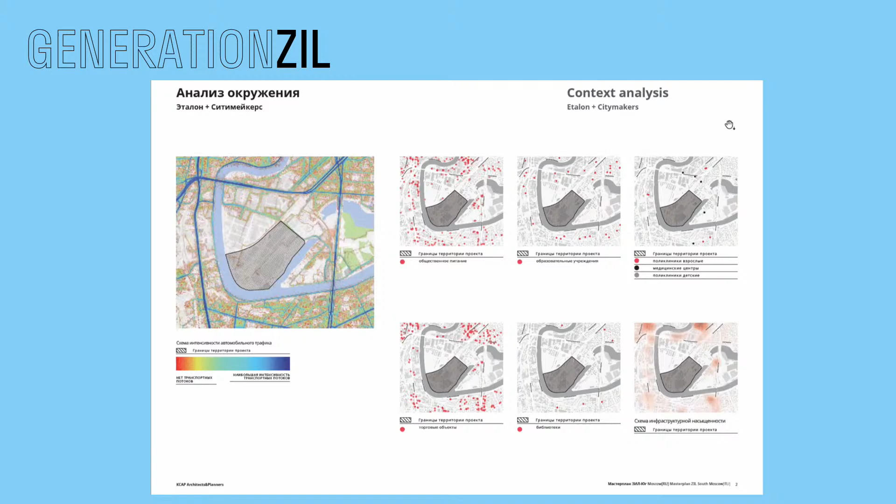Today I'm wearing two hats, not as a council member, but rather as a member of this large and diverse team. Before giving the floor to the colleagues from KCAP, I want to say that we paid special attention to the analysis of environment, all of the urban planning restrictions, specifics of our site, etc. We realized that we need to take a complex approach to the environment, and that's the approach we're using currently.

We're very happy that the client is fully sharing our approach, and together with the project team we are going to enhance it. In parallel, and sometimes even at the crossroads with each other, we continue working, analyzing not only the existing provisions but also regularly improving our vision of the site.

We're enhancing the master plan. This work is headed by KCAP, and already now we're thinking about the landscape, social, cultural concept, the function of the ground floors, and all the matters regarding architecture and development. Above the first line of construction, we already had an architectural council, and we are taking into account transportation, logistics, and entertainment as well.

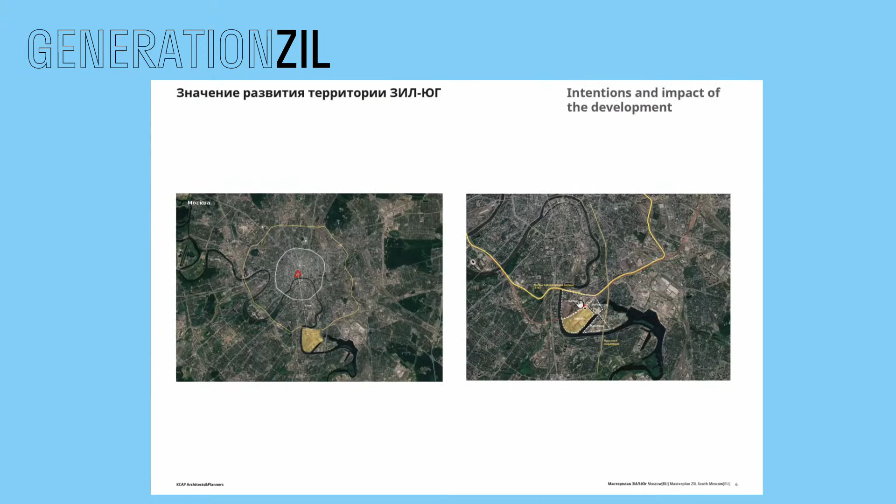For these two stages that we developed together with the colleagues, we developed a lot, and we will give you the summary of the project and the strategy of the master plan. It's wonderful that Etalon didn't just take the site and start building, but saw the huge potential of this site, so they decided to interpret and improve it with experts.

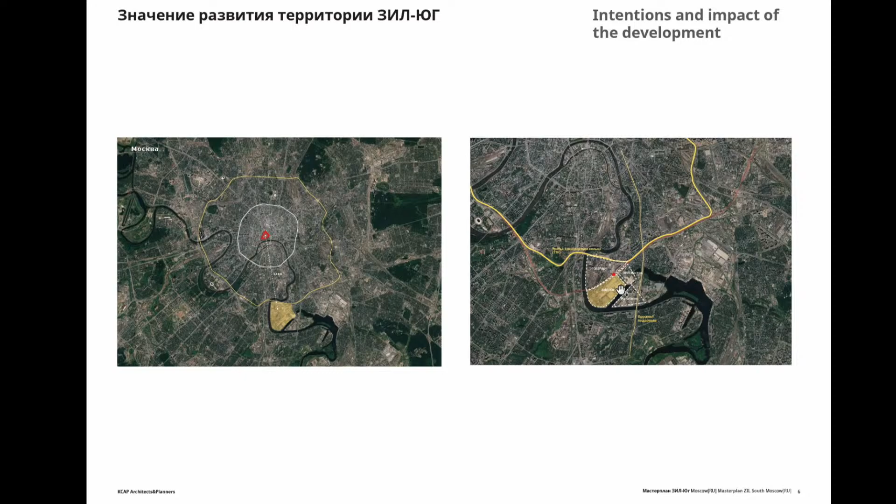This will be a house for 25,000 future inhabitants. For Zil South, first of all we needed to improve the flexible spatial structure framework to integrate it into the city fiber, and within the framework of this city fiber, we develop concepts that will help every site.

At the same time, we want to create a dynamic, innovative neighborhood. We suggest a safe and convenient design that is human-centristic, that promotes human connections. We want to create an active, 24/7 neighborhood that will give a threshold for further growth and improvement of quality of the surrounding territories.

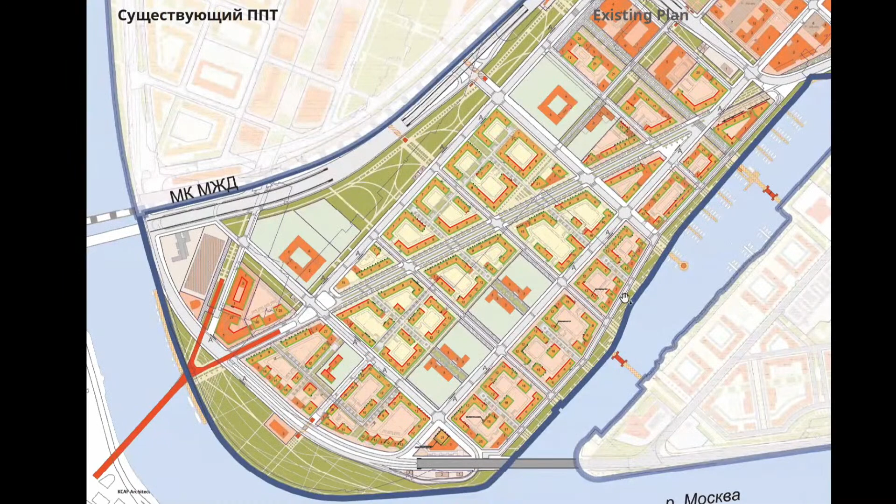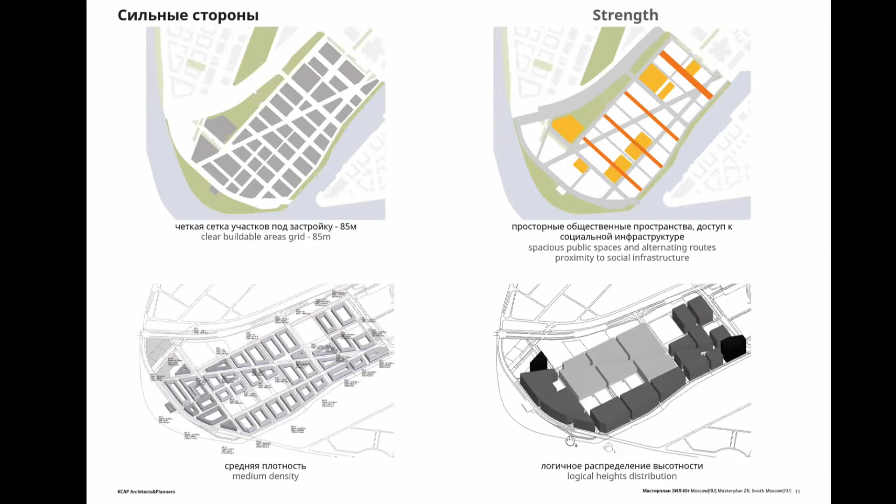A few years ago, the suggestions on the territorial planning were presented. They laid the foundations for our master plan. We have analyzed this document and found the strengths: 85 meters, social infrastructure, average density in the neighborhood, and also density increasing closer to the riverbank and metro station.

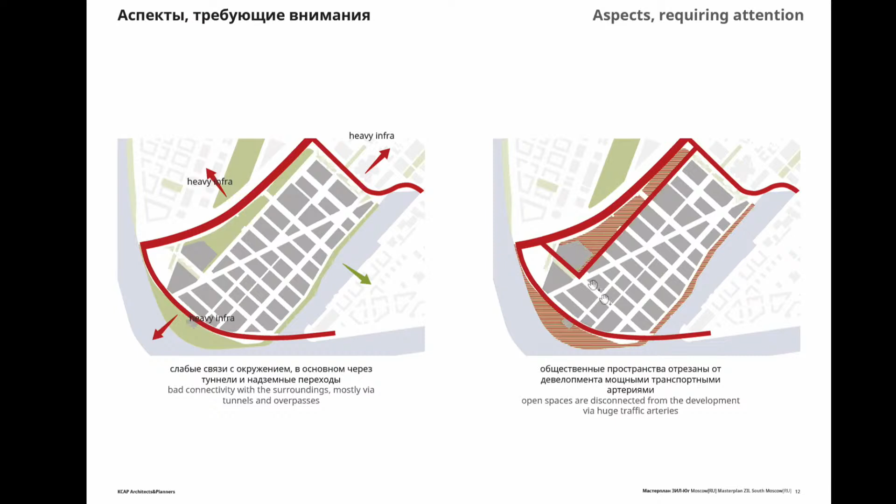There are weaknesses too: connections with the surrounding area mainly via tunnels and above-ground passages, traffic-full roads adjacent to the site, absence of magnetic areas in the territory, and absence of quality space within the territory. The territory was monotonous and lacked big cultural functional magnets.

To enrich the city fiber and make this project strong, we suggest two interventions. First, a central park. It will not only connect Zil to the embankment in the eastern part and connect it to the metro, it will create a special space inside the urban structure.

The second thing is a pedestrian boulevard. It will connect Zil metro station and Zil East on the riverbank. This boulevard will become an attractive route surrounded by a series of small squares, creating a friendly pedestrian axis that connects the entire social infrastructure.

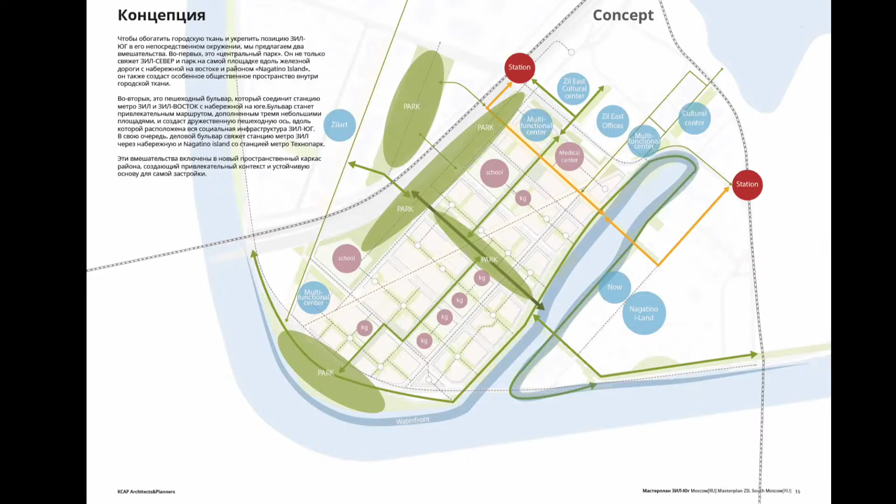In turn, it will connect the two metro stations on the riverbank with the Zil metro station. In this way, it will become a city of short distances, where within a 15-minute walk each inhabitant will be able to go from their doorstep to important social places.

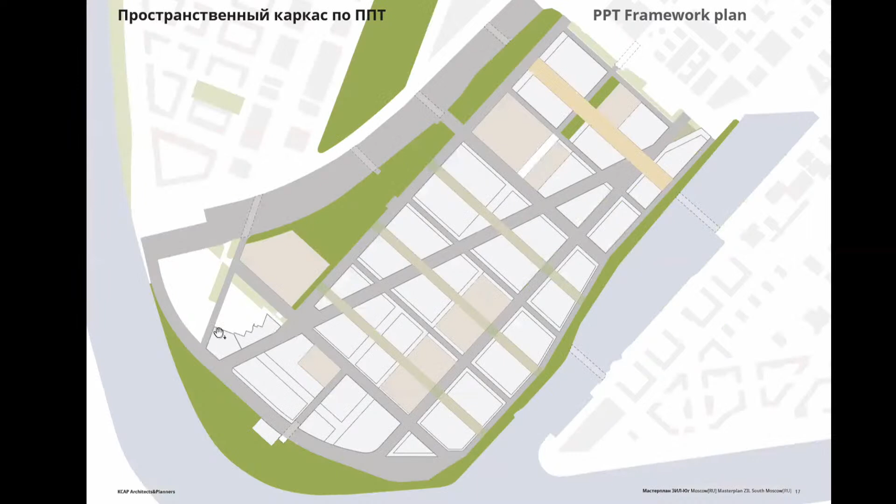On this scheme, you can see the existing document, the PPT framework plan, and our master plan. This is the working version of the master plan, creating an attractive context and a robust basis for the development itself.

Since we have no other spaces apart from the PPT framework, all the developments take place within this space, and the public spaces are there too. The hierarchy of public spaces is solved by the XL scale: parks and embankments, L for boulevards and squares, M for...

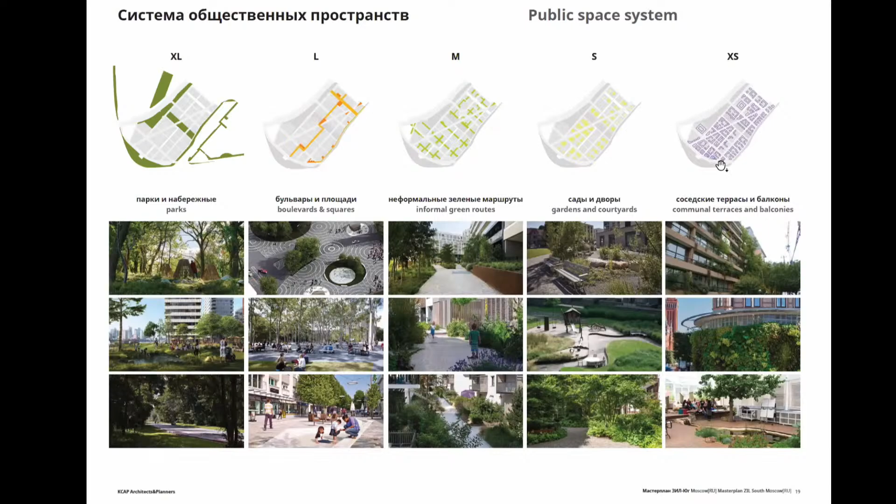M and XS — XS being the terraces and balconies — so the scale is going downsized. You can see here the central pedestrian boulevard, around which we have the central place, the square of the neighborhood, and two community plazas, also the business boulevard with a business square.

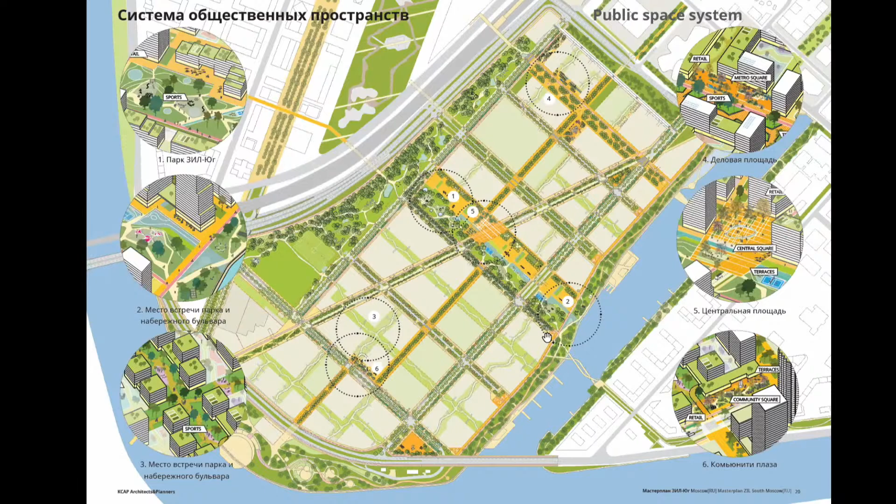It will welcome everybody coming by metro, and also the Embankment Boulevard. It connects with the first square of the neighborhood and a series of small pockets along the riverbank. We also suggest a series of open itineraries inside of the district, penetrating through all parts of the region, connecting them into one.

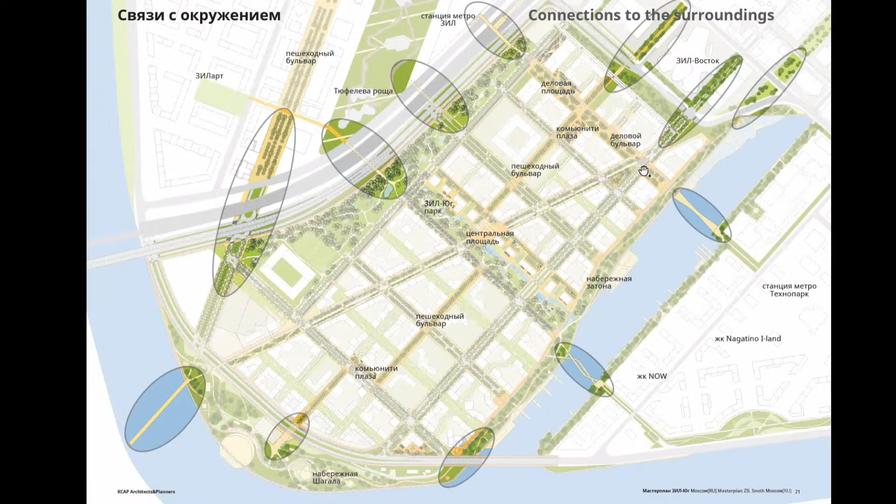As mentioned before, this harsh infrastructure around is cutting off this district from the rest of the city. That's why it's really important to build additional ties with the city: overhead bridges across the river, pedestrian underground passages, and on-ground passages.

What matters here is also the social characteristics of the future neighborhood. Who is going to live there? Which functions are they going to use? We develop 3 daily scenarios depending on the users: local population, tourists, and workers living in the territory, and workers living outside the territory.

We also took into consideration the content of the ground floors. We look at the features of schools and kindergartens of the 21st century. They need to involve new methods of teaching and education to be attractive for children. Secondly, we have large sites for educational and enlightening functions.

So we suggest the social infrastructure to have dual use. We have lectorium, exhibition spaces, stadiums, and children's playgrounds that should become part of the well-being of all the residents. They should be available during evenings, daily, and during the weekends, etc.

We also revised the road network and tried to make it multimodal to make sure that every person is comfortable while moving around. Zil South is about architecture for humans. We promote public transport here, and we have separate lanes for buses.

The urban construction principles and atmosphere of each quarter will be directly tied with the functional magnet it is attached to. Living near water, or in the garden, or in the business quarter, or by the park will also be a brand new proposal on the retail market in Moscow.

Here you can see what the quarters look like. In the river quarters, the typology and space of the buildings is as open as possible and connected to the river. Urban gardens have a specific interior with urban villas and greenery. In park quarters, they have a very wonderful, beautiful position, with highlights to maximize the ties with the business quarter there. The business quarter is more traditional and perimetric, with more focus, is functionally saturated, and is located near the metro station.

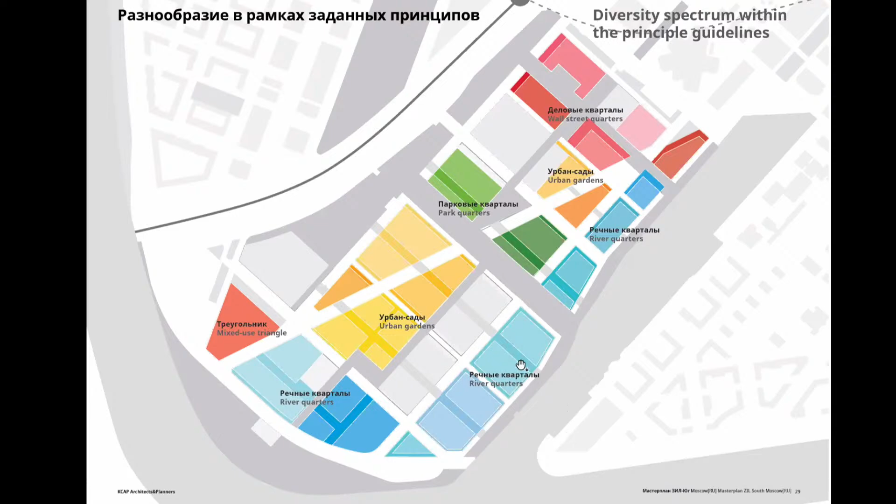To strengthen the spatial carcass, the structure, and to stick to the concept, from the very start we develop a number of guidelines and principles for the development and public spaces. In this way, each site can become unique and yet remain within the framework of our principles.

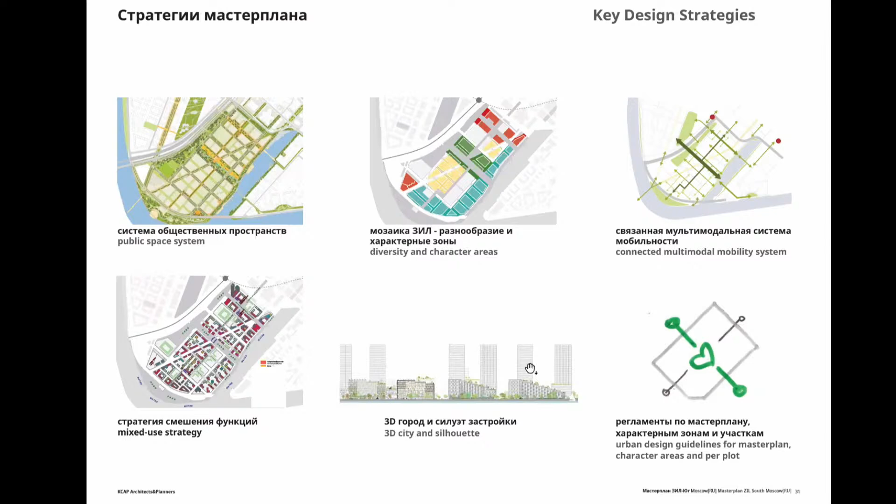Here you can see how the above-mentioned aspects find their place and role in this district by turning it into a happy city. I'd like to conclude and say that we are working within our master plan over public space systems, diversity and character areas, a connected multimodal mobility system, mixed-use strategy, 3D city, and then we develop the regulation. Later I'd dwell upon each strategy separately.

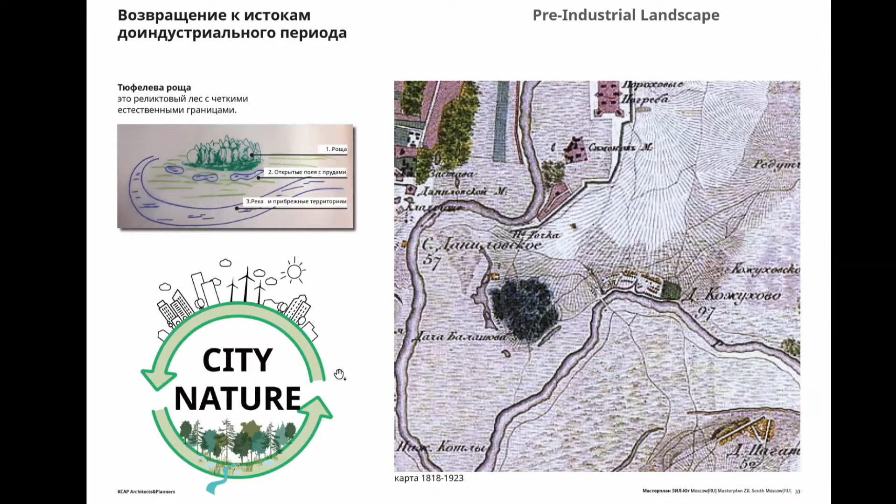The inspiration for this project was the pre-industrial landscape of the past—the Tyufeleva Grove, little forest, and open fields with ponds there. Muscovites in the past used to come here for a relaxing holiday by the riverbank. We transform it into a city of the 21st century. It is infused with urban culture.

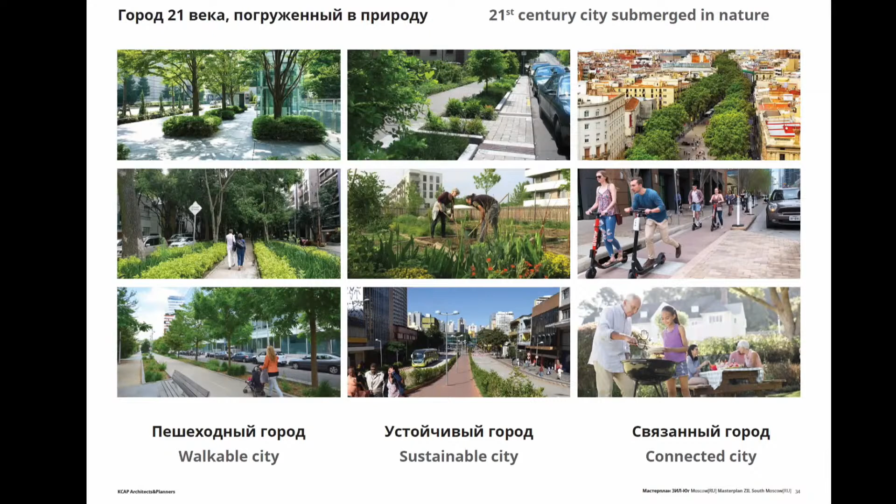In this neighborhood, we will have modern people living who take care of their health. In Zil South, a sporty lifestyle is promoted. Priority is given to pedestrians, cyclists, and public bus users. It's a sustainable district with a functional landscape that promotes educational and social programs as aspects of social well-being.

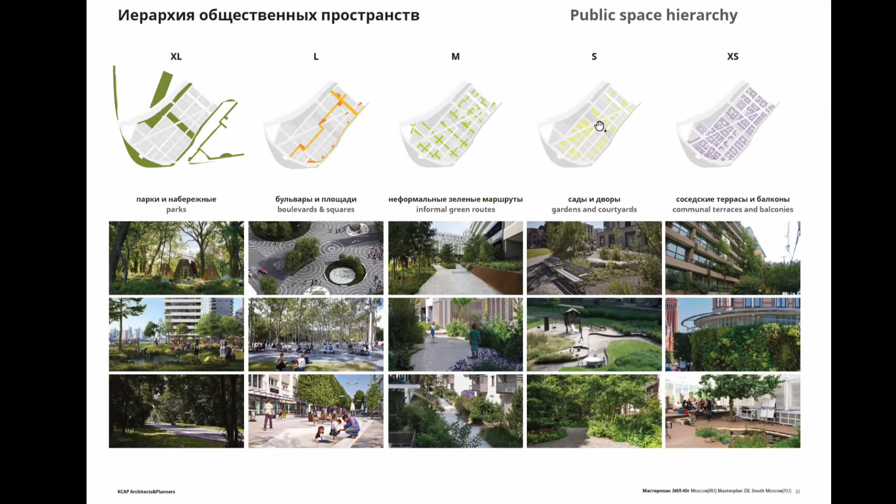As mentioned before, the framework concept of the master plan involves 5 scales: XL, parks and embankments; L, boulevard and squares; M, green routes; S, gardens and yards; and XS, terraces and balconies.

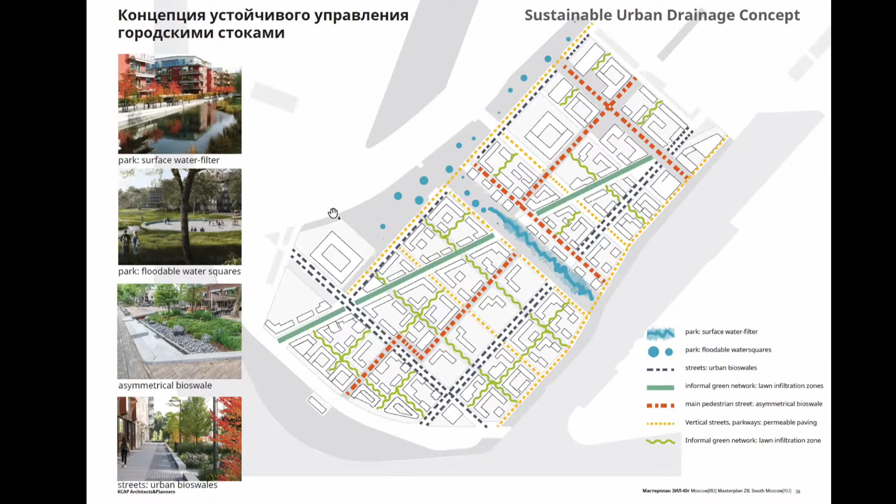We believe the landscape should be functional and reflect attractive design. We deploy a bio-drainage system in all our public spaces - technologies for retaining and treating rainwater, including dryable ponds and sites, and mini drainage. We plant trees to protect the environment and minimize its negative impact, integrating trees to make our environment humanistic. We minimize plastic to make it sustainable.

Let me tell you briefly about each scale. Parks and embankments - parks have their own ideas and design. The central and northern parks are united, and it's important that they tie with a Tyufeleva Grove, or Tyufeleva Roshcha. It's interesting to see how one park is transcendent with another, and going from one park to another is another adventure.

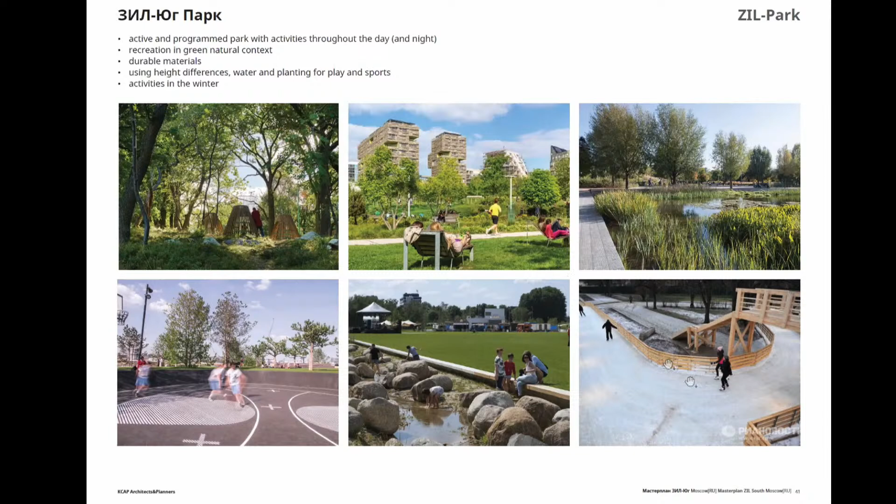The parks are active throughout the entire year, with place and role for quiet leisure and sports. In wintertime, our ponds become ice skating rinks, and the hills become sleighing slopes or ski slopes. We have Roshcha, fields, ponds, and water nature at the riverbank. Roshcha is as natural as possible, with a real forest to protect the neighborhood from noise coming from the railroad and the new highway, and hills of different heights.

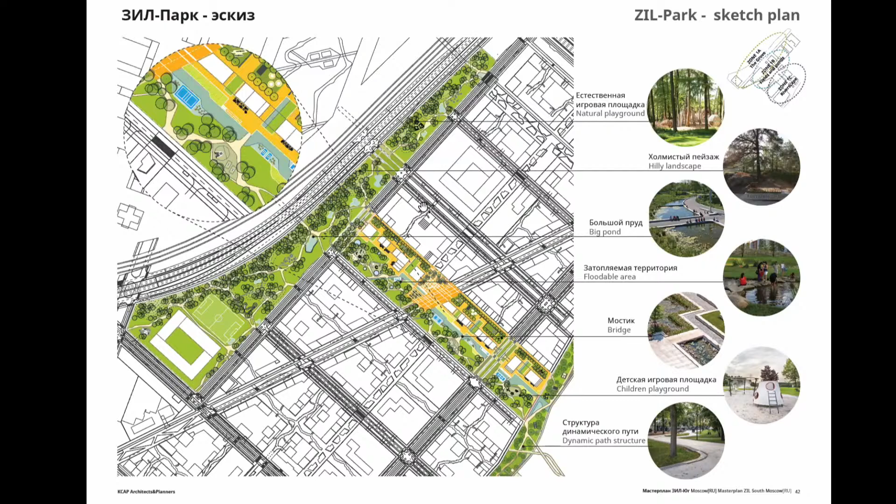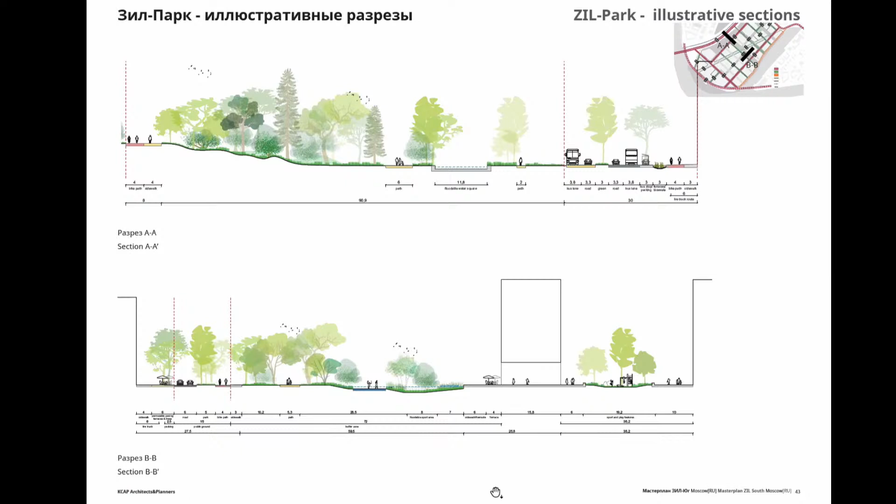We can also see here how our main route and the park concept are integrated in the embankment. The borders are almost seamless - one park is transforming into another.

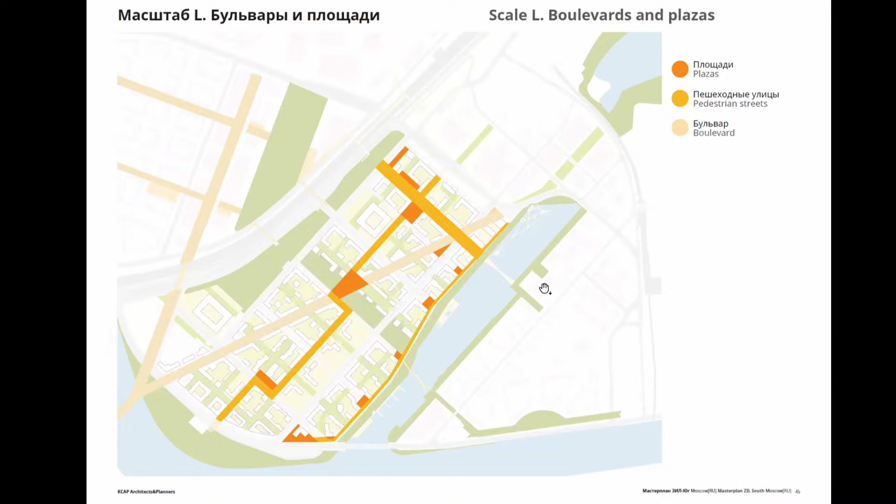The second scale, L, is about pedestrian boulevards - a pedestrian boulevard in the central part of the neighborhood, and the business boulevard from the embankment of the river. The design is associated with the typical area the boulevard is located in. The central square is the pulsing heart of the neighborhood, where all the junctions meet together - the parks, the diagonal boulevards, etc. The size of the square enables different open space events there: markets, lectures, fairs, exhibitions, etc.

Jana, we are losing your voice sometimes. It's intermittent. Well, why don't we listen to Mikhail now, because Jana's connection is not so good. She's freezing sometimes.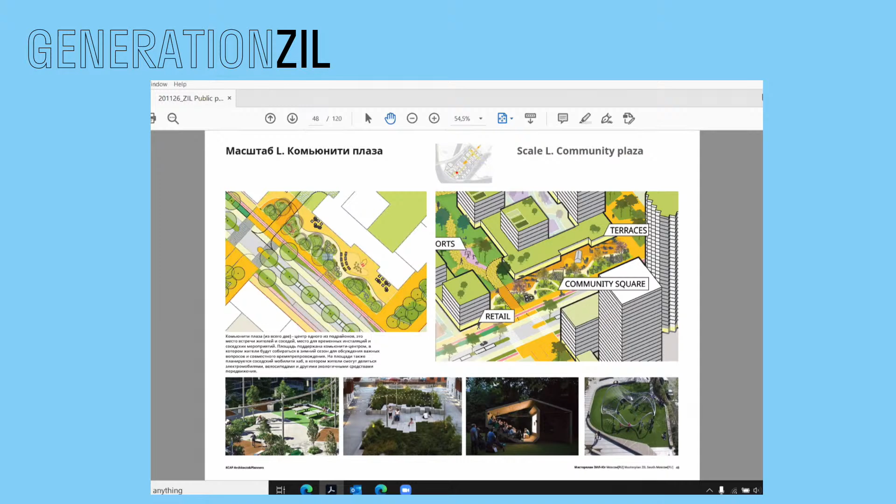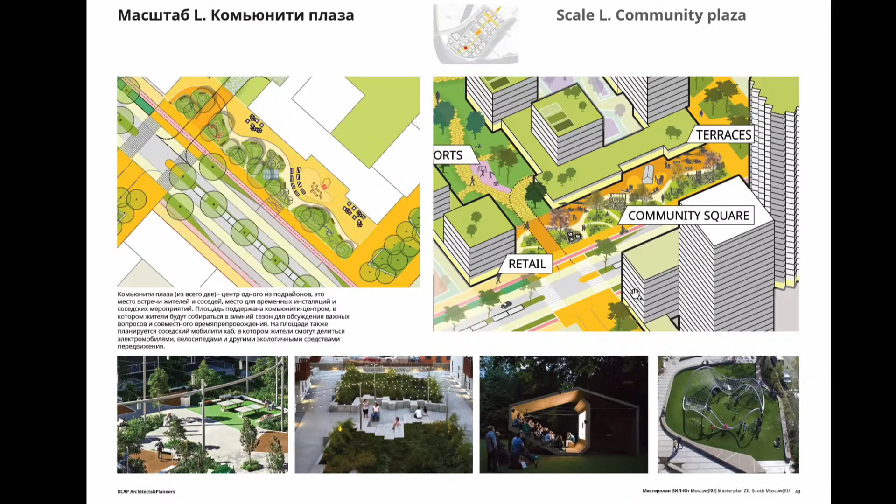So we talked about the squares, the first central square. We also propose to organize a community plaza on the way of the pedestrian boulevard. The squares will be functionally supported by the community centers, and there will be some bike, scooter, and electric vehicle rental, etc. They are located between the first and second line of construction development.

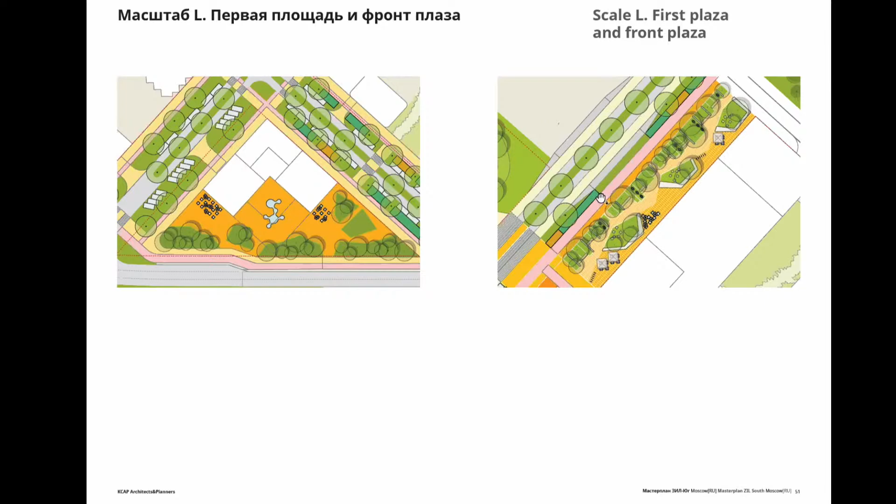The second area is located closer to the business boulevard. The business square is where the metro passengers will come. It has functional diversity of the buildings around. Apart from the above mentioned squares, we have one more square — the first square of the neighborhood, near the first line of development, and the frontal business square near the metro station.

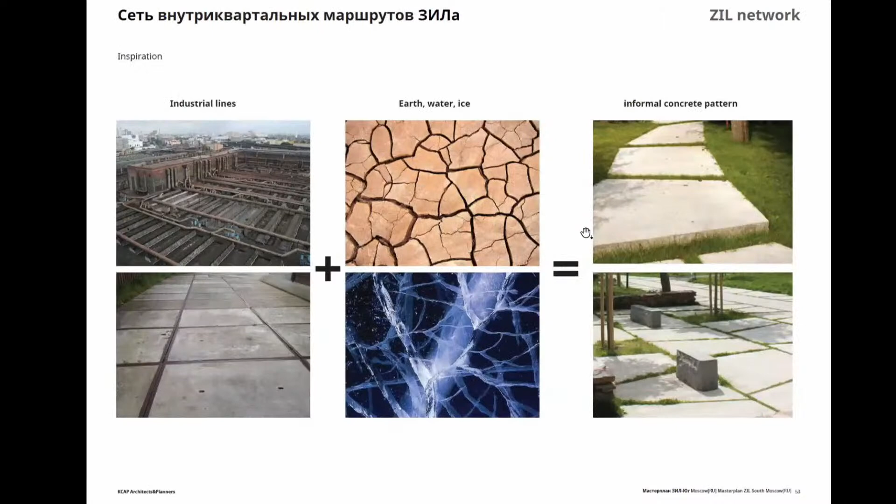The project also envisages a network of pedestrian alternative routes. They are supported by active functions, and they will connect all the sites of ZIL neighborhood, creating a kind neighborhood atmosphere, not only within the yards but also in the district in general. The recognizable uniform pavement and mini drainage are the main principles of these routes.

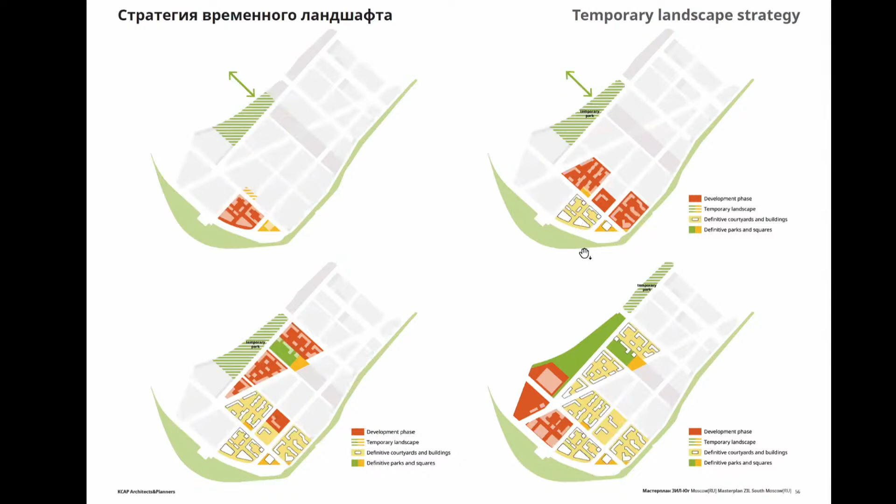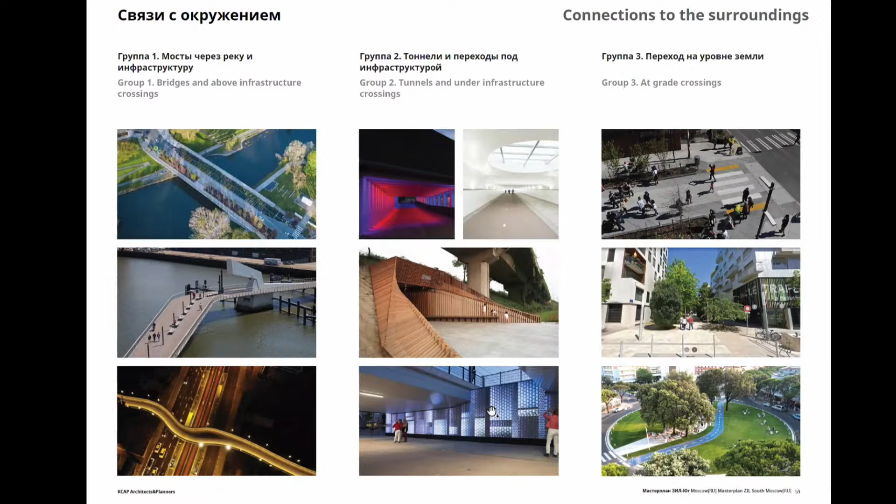We also developed the guidelines for the yards. We think about the strategy of a temporary landscape tied with the rows of construction. It will help us build temporary facilities and develop gradually the entire neighborhood and the landscape. We keep in mind the environment and we care about the quality, so we make suggestions about safe pedestrian underway passages, bridges, etc.

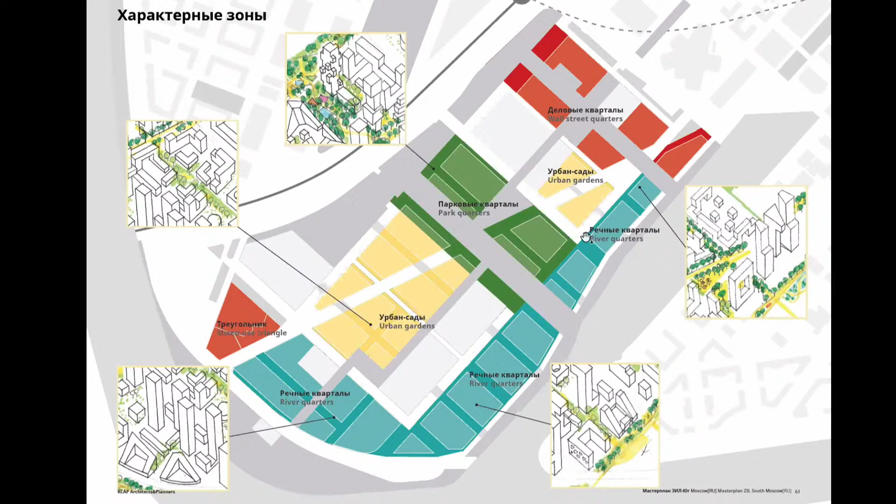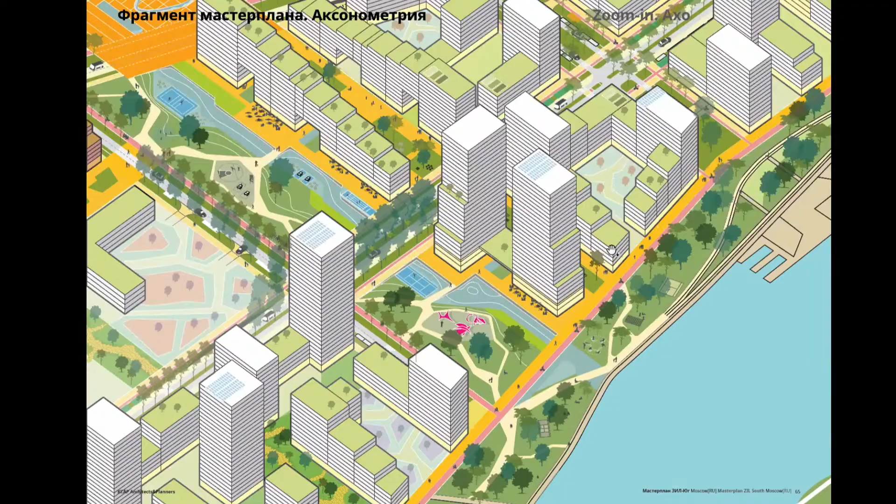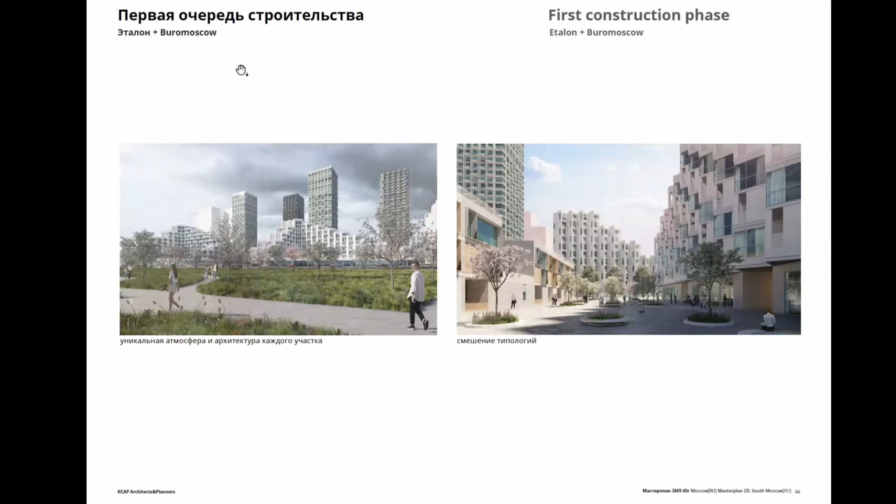Let me tell you about the mosaic — the four typical areas: river quarters, urban, park quarters, and business quarters. Each of them conforms to a particular set of urban construction principles, landscape, and typology. What is the river quarter about? Views of the river, mid-story buildings, high dominance on the second line, maximization of view, refurbishment, and separation of private and public spaces of the yards by visual barriers and heights. The construction complies with all the principles and becomes a pioneer in discovering the entire potential of the territory.

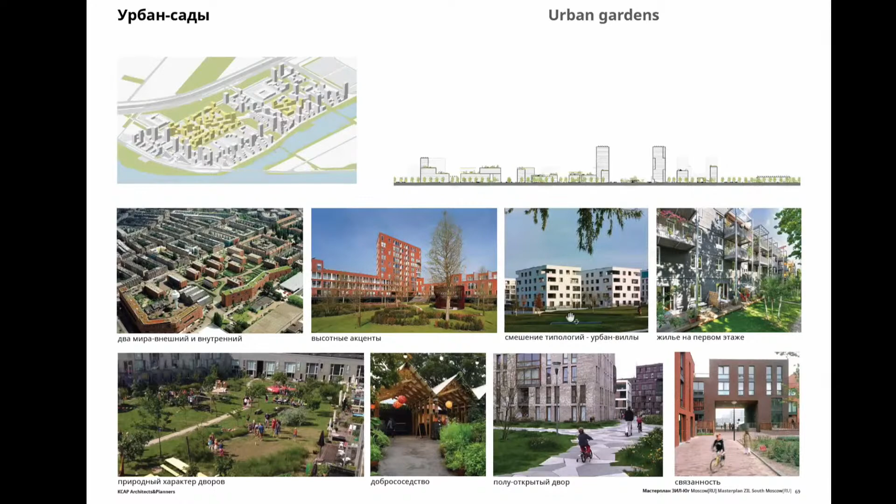What do we mean by privacy and protected neighborhoods? It's urban gardens, places for urban farming, greenery and plants for these low-rise buildings. It's a humane scale of the environment.

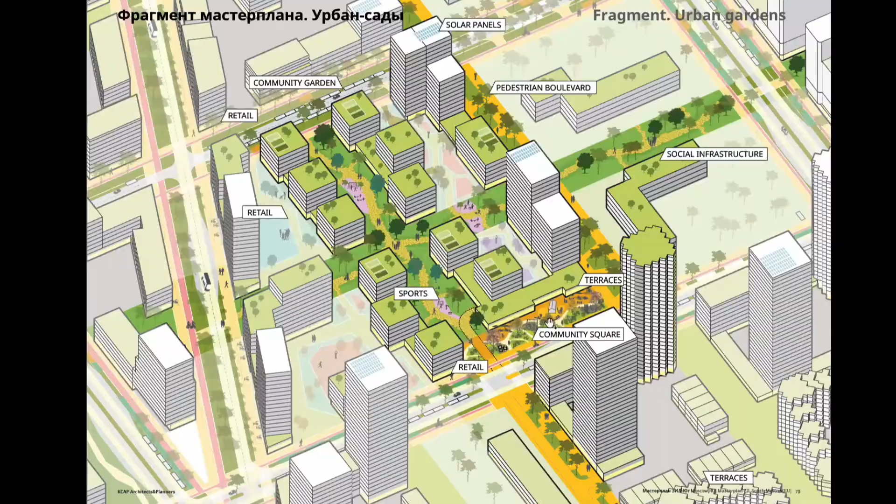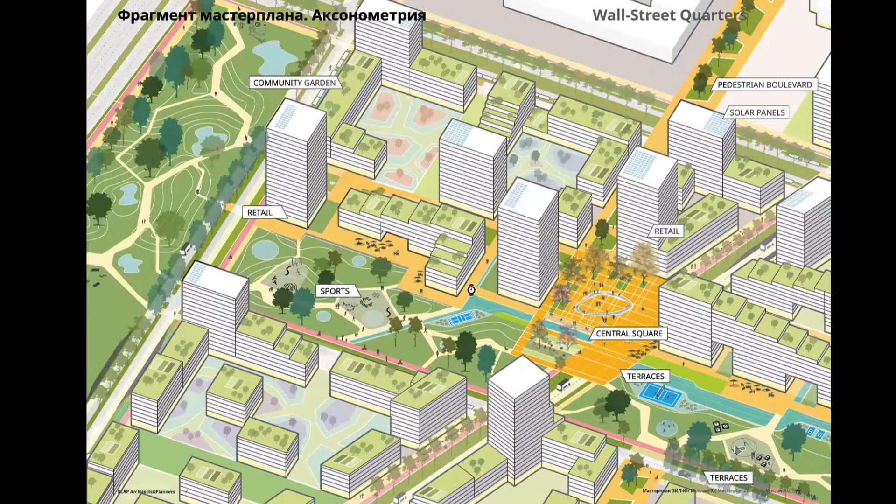Life by the park — it's when you have a park instead of a yard, when you live in a unique architectural building that is the business card, the window of the entire neighborhood, when we maximize the range of various technologies here and the richness of the environment.

As for living in the urban quarter, it's about proximity to the metro station, active and functional environment, enclosed and semi-enclosed traditional quarters with high-rise accents, and strict landscape design. We mentioned the places for landscape architectural dominance where the design should be beyond imagination.

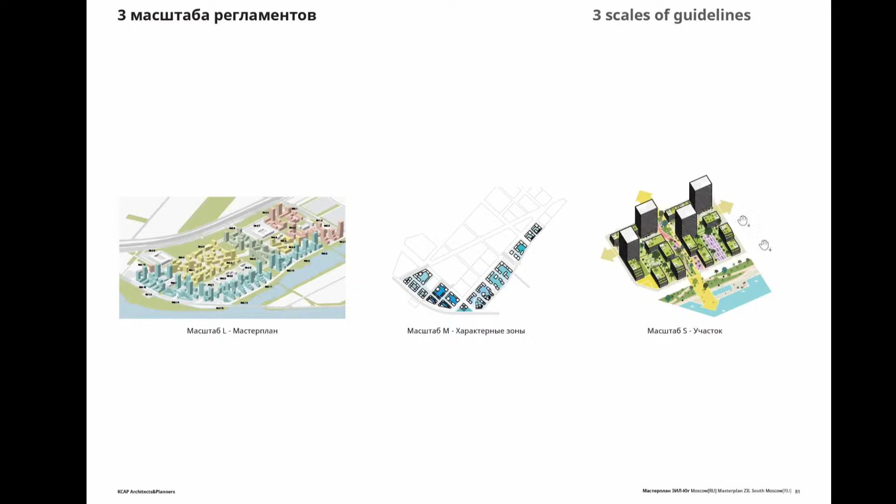It's an invitation for the architects to leave their trace in ZIL-South. These facilities, these buildings will be the iconic ones, and they will be remembered by all the visitors and inhabitants. We developed urban... three scales of principal guidelines.

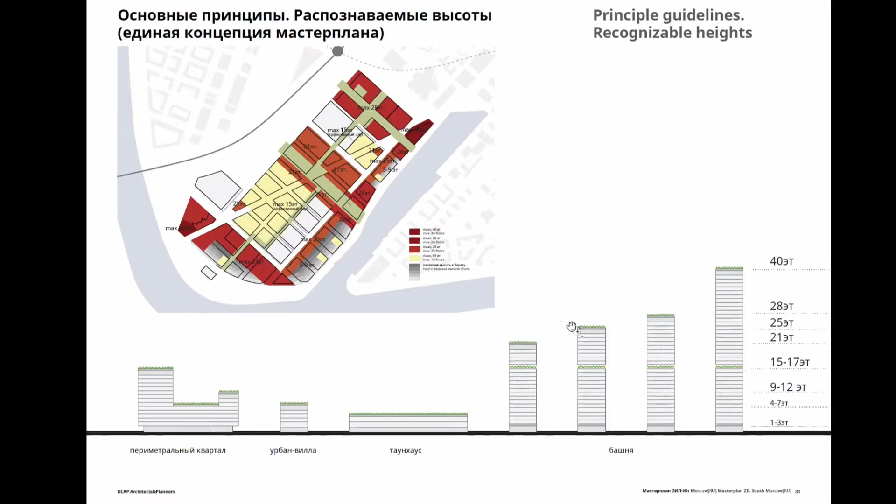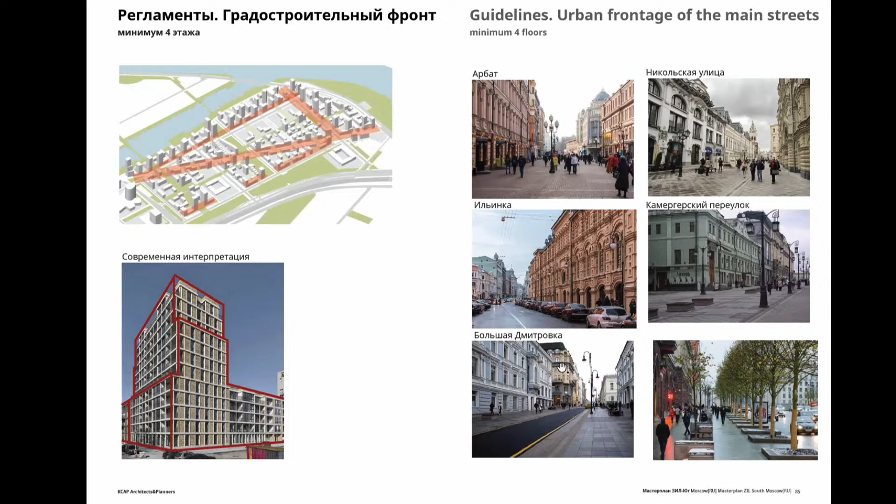Here are the examples of principal guidelines: a spread of density of distribution and human scale. We allocate different high-rise accents, different recognizable heights, and also a uniform silhouette of the development - an urban background from 4 to 7 stories. It's a well-known principle observed on the best historical streets of Moscow and Europe.

For each typical zone, we develop its principal guidelines. For every site, we have a certificate with the main principles, which will work as the terms of reference, given to each architect of each site.

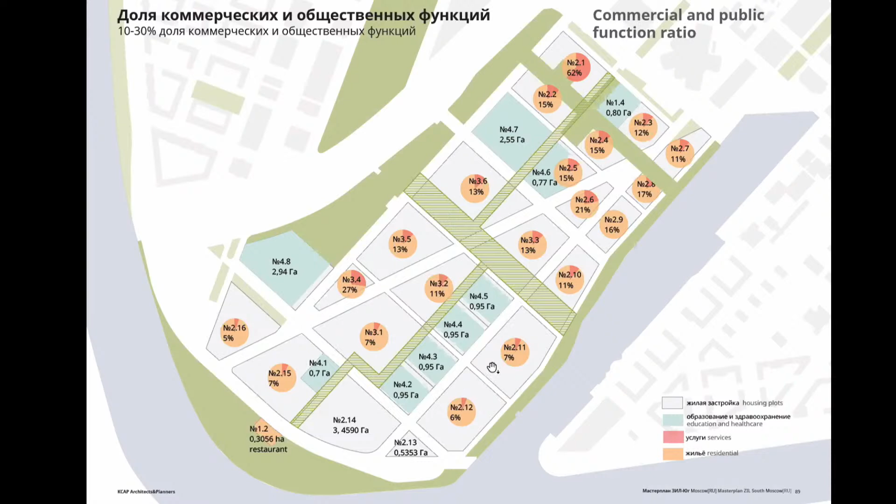At first sight, it may seem that it's only housing in this neighborhood, but in fact, according to our PPT framework, we're activating almost all the ground floor facilities, outlining a truly active environment 24/7.

The most active areas are embankments, parks, boulevards full of retail and cafes, community plazas with community centers and other supportive functions. Supermarkets, services, offices, and co-workings are concentrated along the public transport routes.

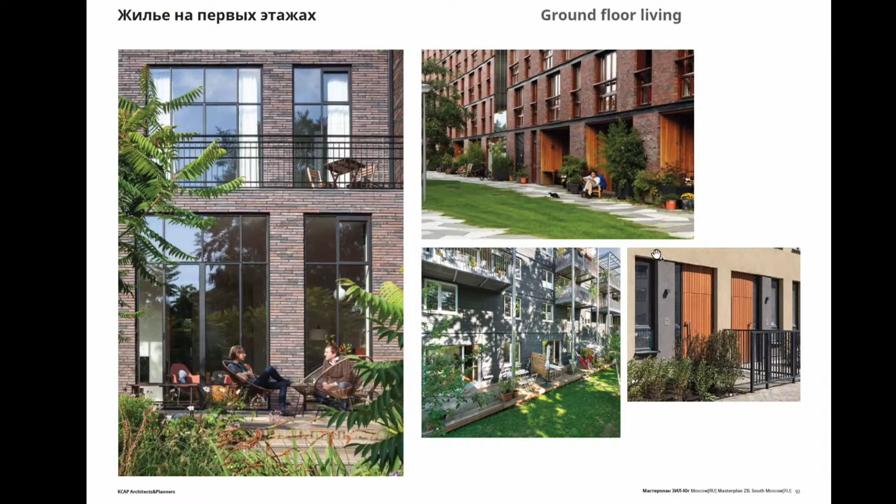We have a new typology in this especially dense neighborhood, with a small percentage of housing on the ground floors as well, for diversity of choice.

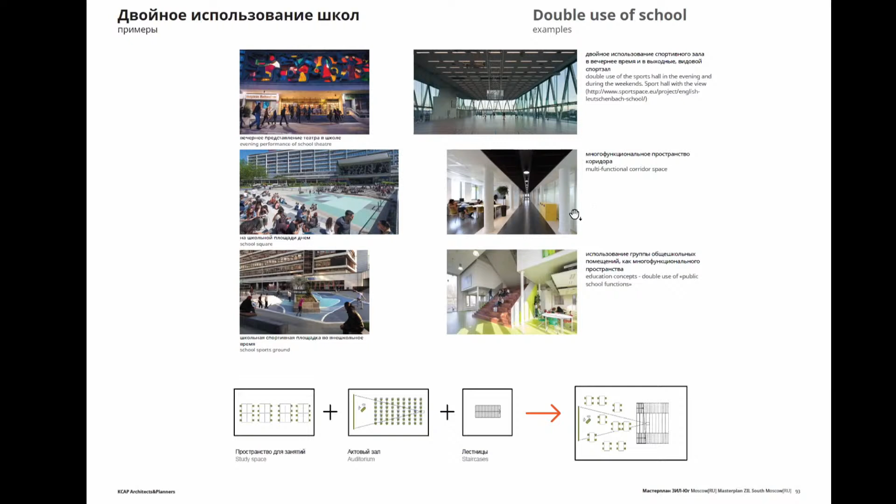As was said, we didn't mark places for large cultural facilities, so we suggest double use of schools. Exhibition spaces and lectoriums should be part of the school and available for residents in the evening and nighttime.

The last important chapter of the master plan I'm going to talk about is the multimodal mobility system. We promote human-oriented design. ZIL-South is a small city of short distances.

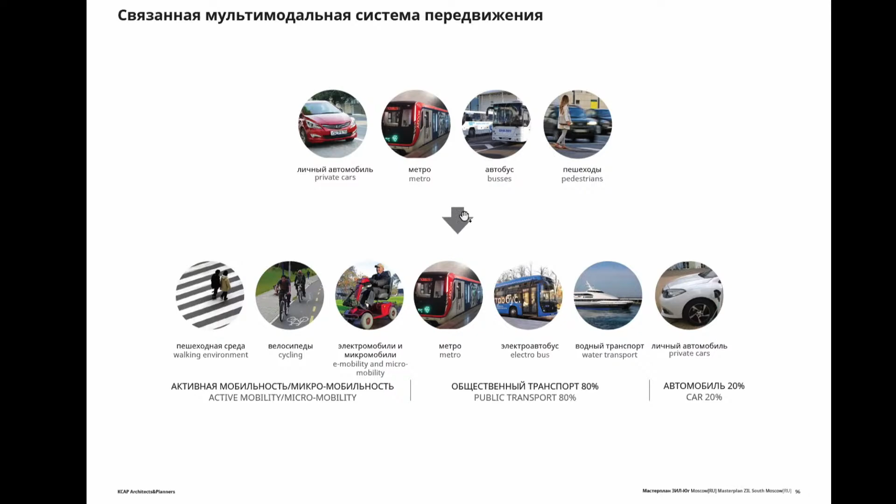Within a 15-minute walk, we cover the whole range of people's needs. It's a healthy quarter with streets full of trees, minimum traffic, and minimum CO2 emissions. The traditional set of vehicle, metro, bus, and pedestrian is expanded to set new priorities.

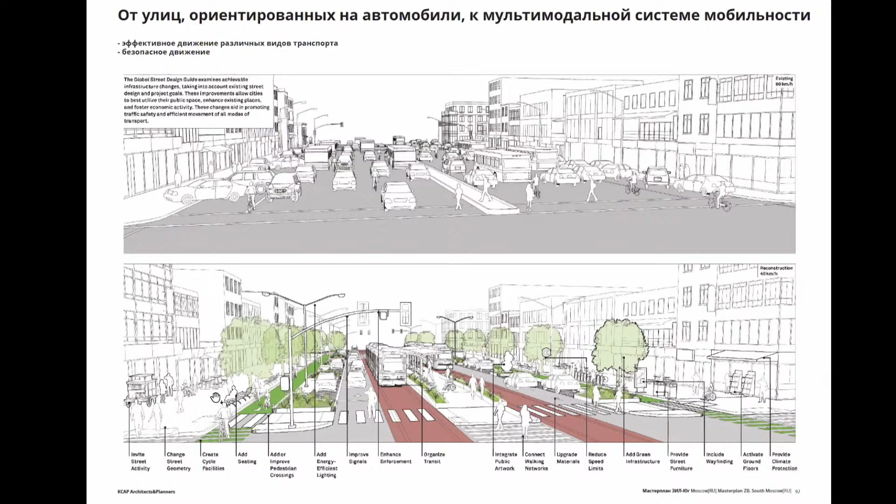Number one is human, and all other members of traffic are ensured comfortable and barrier-free movement. Each has their own area: pedestrians, cyclists, public transport, cars, flexible greenery and parking.

In ZIL-South, we promote public transport. Buses will have their dedicated lanes, and people will develop a new habit of using quality public transport. We also know that safe public transport is the policy of the entire city of Moscow.

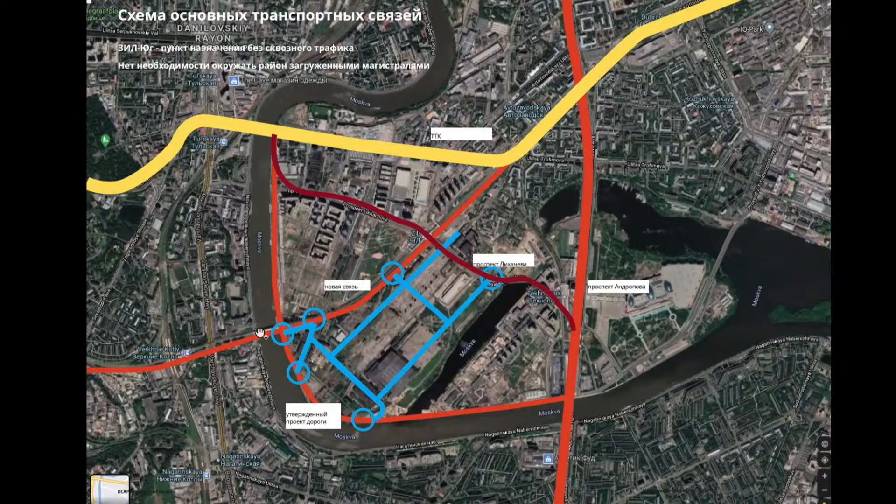So we decided to revise the intensity of traffic that the PPT suggested and to insert multimodality there. Another thing we need to consider is the new railroad that will cut off ZIL-South from the Zil Art neighborhood even more.

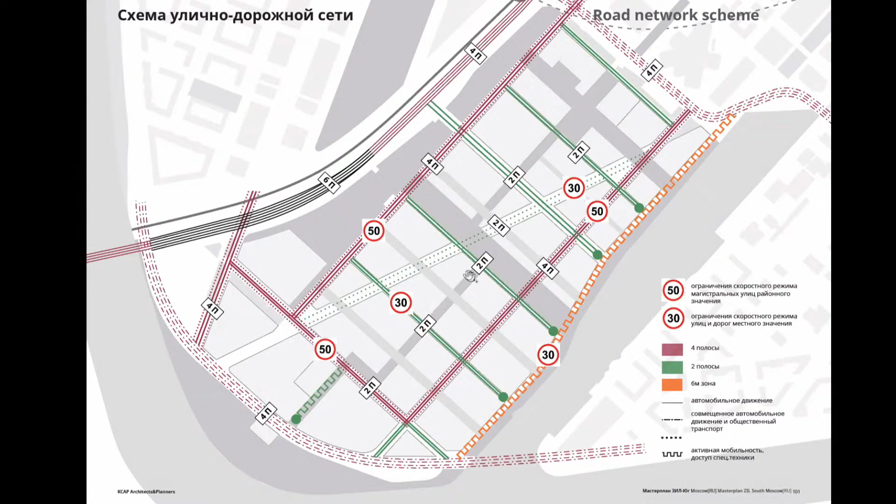With our suggestions on improving the transport and road network, we are not deteriorating any requirements. We keep the lanes for public transport, diagonal lines for vehicles, vertical ones for vehicles too, and take away the main vehicle traffic to the sides diagonally, to organize a safe, complicated junction with different passages.

We developed additional ties with the existing urban infrastructure. The territory connects with the highway from the embankment in 3 places: here without a crossroad, here closer to the center with a crossroad, and under the bridge with a new main road.

And we connect to Likhachov Prospect with this crossroad, and this is MKZD - centrally, we connect to it.

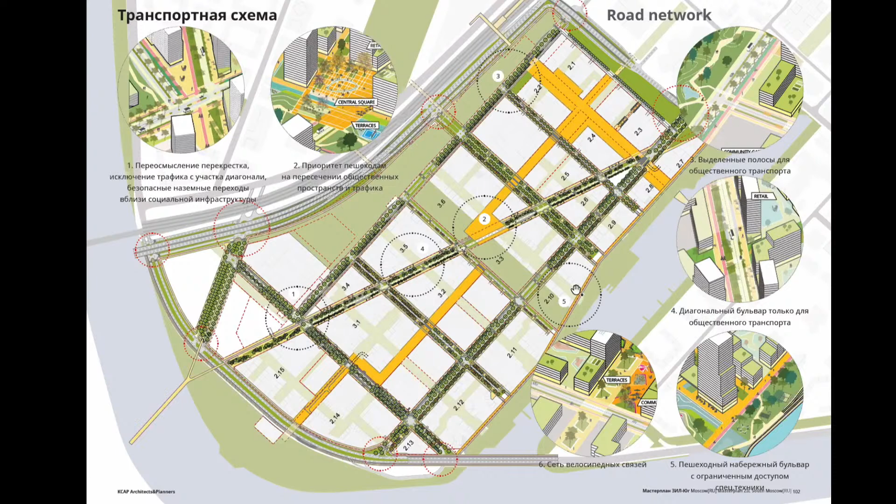Our transport scheme will be modeled and calculated. It contains flexible input, so in the event of problems during operation, we can always adjust it to different conditions. Pay special attention to the road infrastructure - it will be funded by city investment, and it's very important to synchronize road construction with the development plan.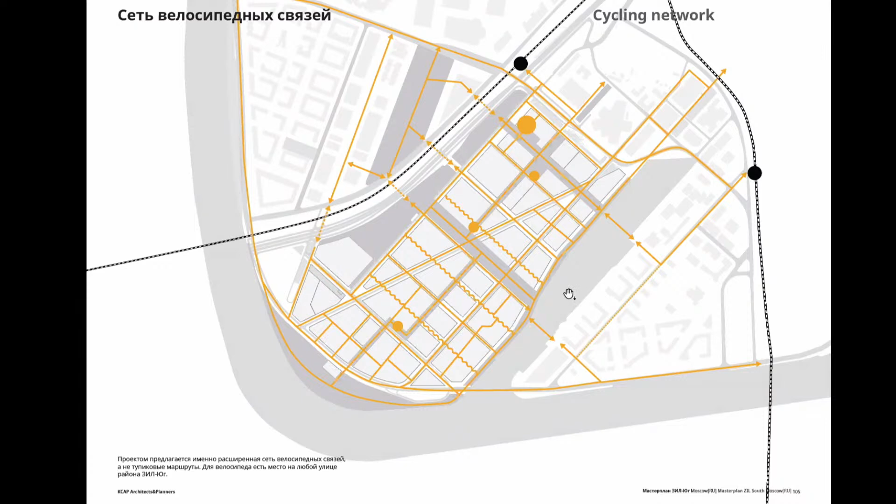On this layout you see the public transport routes, and here the suggested cycling network. The project envisages a cycling network, not just blunt streets, with 3 possible scenarios of daily and weekend routes depending on the users.

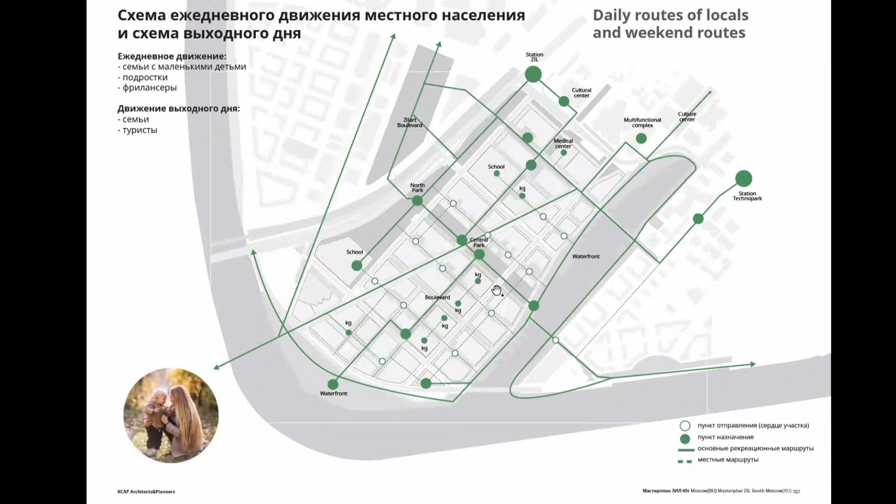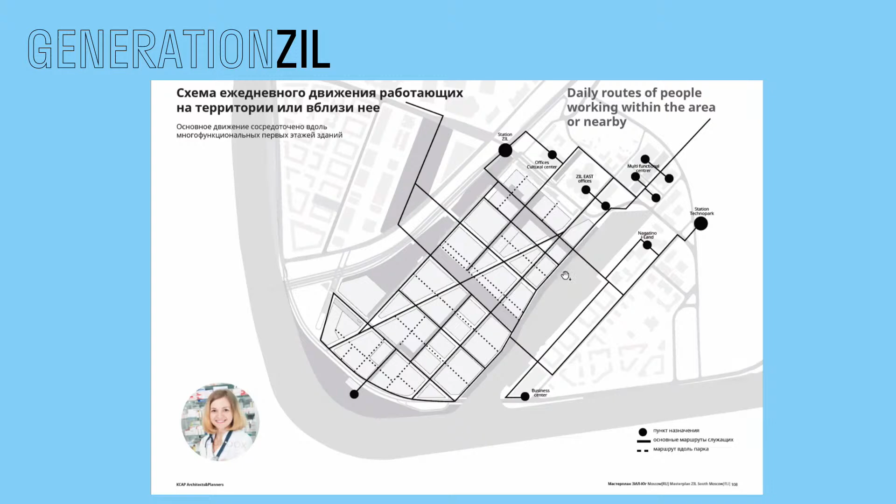The local population, families with children, will use the recreational structure and district routes daily. Tourists will come here during weekends. Business people who come here for work will use the functions here. Those who work beyond the territory will choose the shorter distance to the nearest bus stop or metro. We also think about a safe environment.

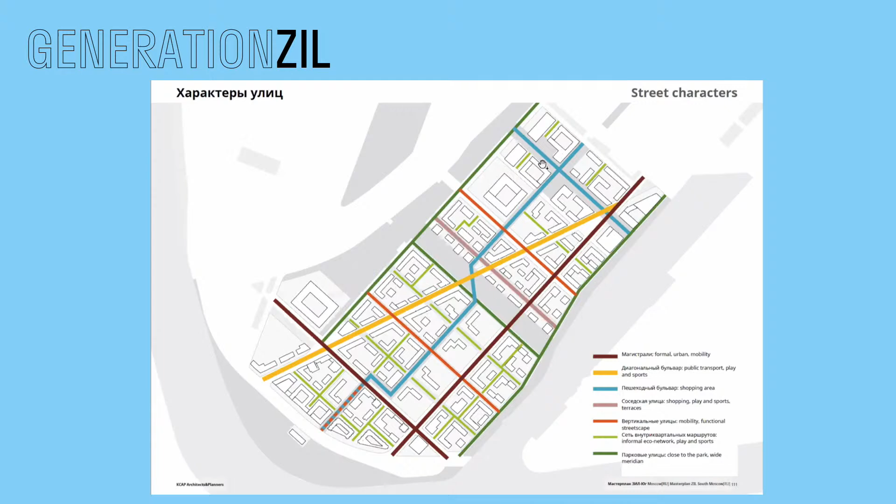Uncrowded crossroads, smart traffic lights, safe areas near schools and kindergartens, safe passages near central square and junctions, and also barriers to reduce the speed of vehicles. The nature of the streets ties with the functional magnets they are adjacent to. Thus, we have the city highways, park streets, park alleys, pedestrian roads, and neighborhood streets.

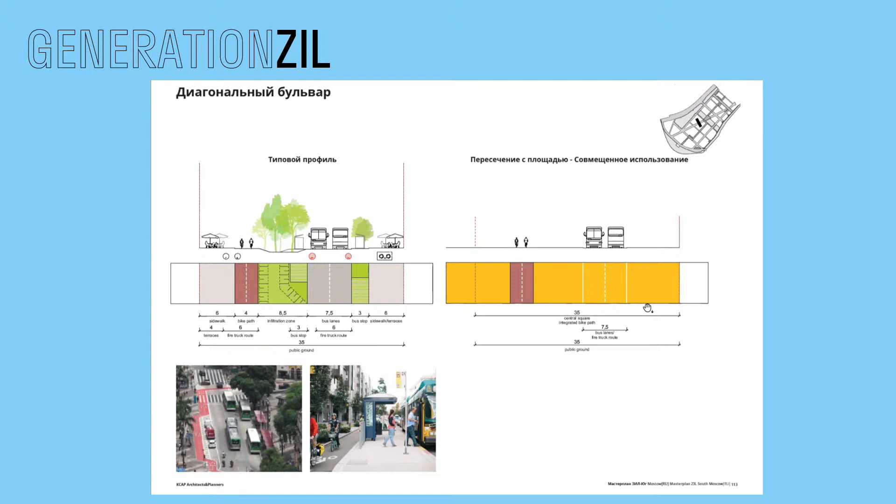The pedestrian roads are wider. We have good terraces. We have bio-drainage trees in the green area and also playgrounds. As the buses drive closer to the urban connections, we can see the pavement there.

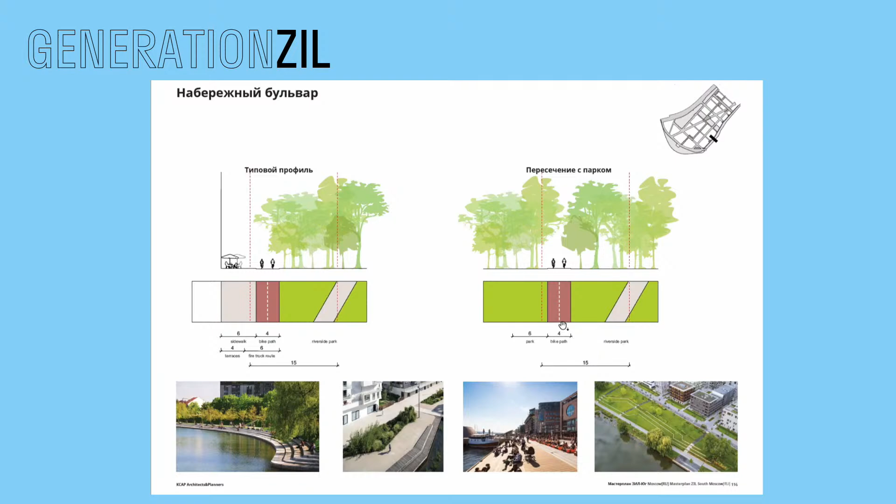This is the boulevard along the central park, grown-up trees, greenery, functional vertical streets with the maximum parkings. And from these streets, we drive in the most parts of the site, Embankment Boulevard. No vehicle transport makes the riverbank space friendly for cyclists and pedestrians. It brings the river closer to the yards and the buildings. In the junction between the embankment and the park, we see both parks merging together. I want to say that all the profiles were developed considering the organization and rules of special machinery accessibility.

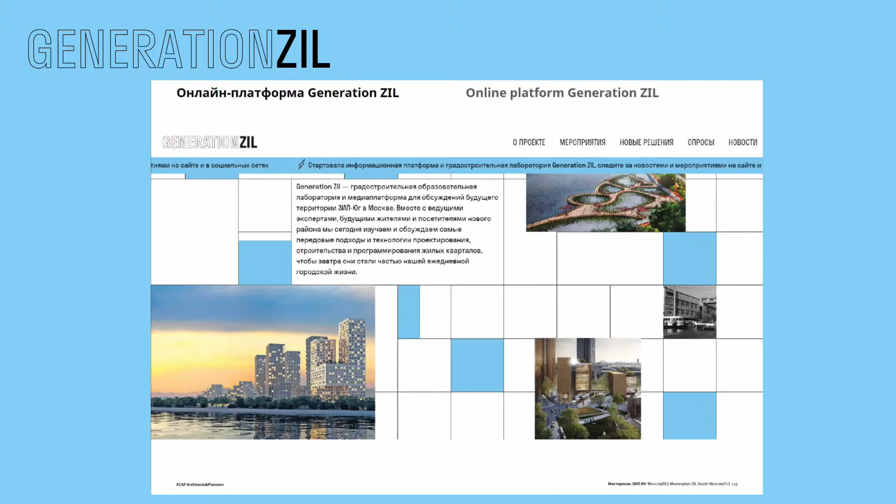Online platform Generation Zil is an important aspect to support our project. From the very beginning, Etalon and city makers organized the Generation Zil platform. It hosts different events like the discussion today, where the experts discuss the new potential of the city. We involve the future inhabitants, workshops with stakeholders, and the position to raise opinion for any participants is a distinctive feature of our project. We presented the working version of the master plan to you today.

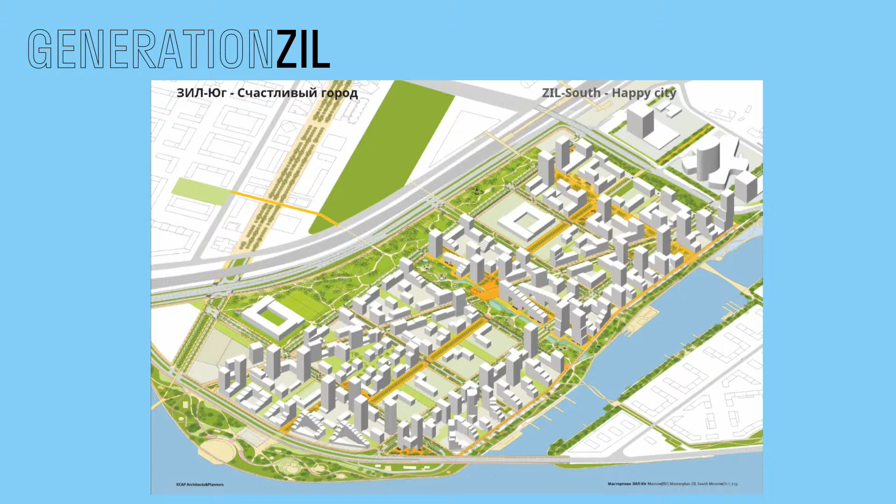This is the result of the maximum coordination with all stakeholders. In the future, we'll soon be developing the final version of the master plan, and now we are open to your comments. I'd like to say in the end that we wish we would get the support from the city on the following things: human centristic neighborhood, organization of bus lanes, and rejection of the road along the riverbank.

Second, the relevance of the central main road MKZD that will cut off Zil South from Zil Art. Is it so necessary to build it there or not? Quality implementation of the city road network according to the master plan proposals. Number 5, all the ties with the adjacent neighborhoods. And number 6, support of open public spaces and intra-district routes internally, and no barring and fences.

This is the end of my presentation. Thank you so much for your attention.

Thank you very much, Yana. Indeed, it was a complex, big work done, and I switch to the questions now.

We have several questions from the members of the Architectural Council. You can ask questions to the colleagues from KCAP or to Maxim as well, the client. Okay, Mikhail, please. Thank you very much.

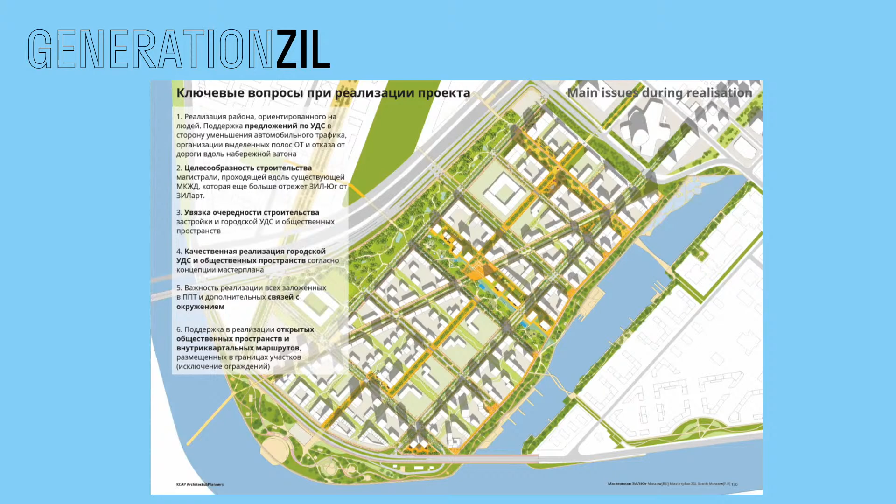This embankment used to be part of an urban planning project in the past, and it was supposed to be one of the main city highways. But we approved the plan and moved the main part of traffic deeper into the island. After the third ring it turns to Simonovskaya embankment and continues further right, which you cannot see on this map.

So yes, we do have this highway for vehicles. We need to work with the profile to make it a normal embankment, but having vehicles drive along the embankment is something normal - there are many examples like Croisette, Promenade des Anglais in Nice, and Copacabana. So please take it easy. It's not that this highway chops things off, but we do need to enhance the road profile and turn it into a quiet boulevard with slow traffic, comfortable traffic lights, and comfortable pedestrian passages.

I want to say that this is not a highway. It's not a high-speed highway, not at all.

We have a question from our audience about the future of the pedestrian bridge - there was a pedestrian bridge planned on this diagonal, between Zil South and Zil Art. Regarding this bridge, so far there are no plans to build it. The city is not planning to build this bridge because of expenditures, but nothing prevents us from preparing the papers for urban construction. If an investor expresses initiative to build a bridge - and we have examples of investors investing in bridges - let's consider these scenarios.

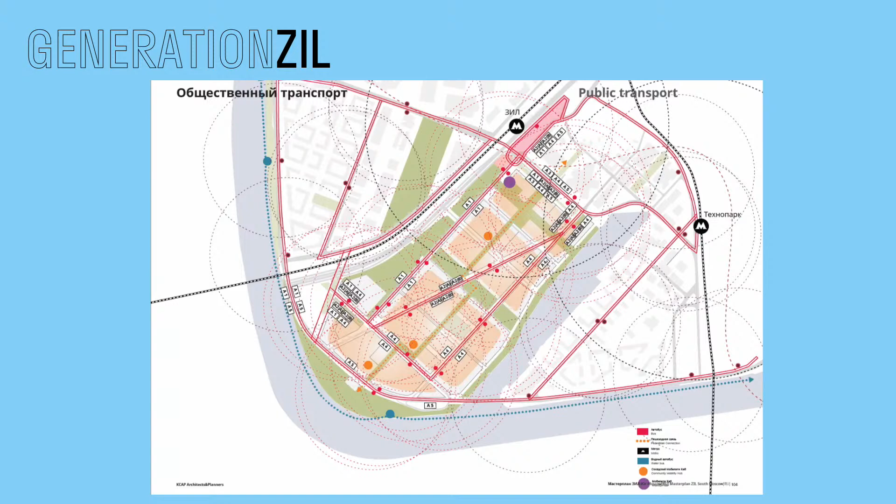Second question - there was a comment during the discussion that vehicles drive straight into the underground parking, but we also have taxis, and situations where a young mom with small kids and lots of products from the supermarket takes a taxi and drives to the entrance of her apartment. These scenarios should be considered by the developers, please work on them because they will increase. Car sharing too - we don't quite know if it counts as public transport or something in between.

The third question is to you, Peter. Have you analyzed the already constructed Zil project, since it's a similar project done by the same people? Have you done a survey about what the residents of this neighborhood think about the project, what the city thinks about it, and what other Muscovites think? Have you analyzed the opinions, trying to mitigate the negativity around the Zil project for this future project? These are my main questions. And one short question - I didn't see any entry into the island from the big roads. I think you could make more. I know the experts know it better, but these are my questions.

Let's start with the first questions. Yana, please - the junction connected with Zil Art. Maxim, you should take this question since we discussed it a lot. Yana, please.

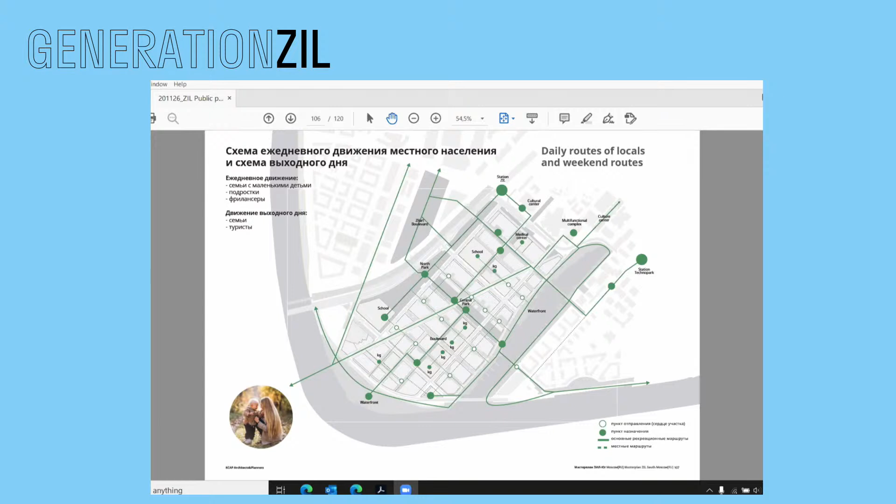I thought that we elaborated on this aspect in quite detail. Inside all these sites, we have open routes with no fences, no bars, and a lot of variants how to pass through, not only diagonally, but also from every side. You can walk internally, take a pedestrian boulevard, any route to get to the metro or bus stops. The shortest way between two points is a straight line, and experience shows that zigzags are not the most optimal way of getting as quickly as possible to the metro.

Why haven't you done it? Maybe it was somewhere in PPT. It's a question to PPT, I guess. When we got the PPT, we have the PPT framework that we are not allowed to change. We have the red lines of the roads and the border lines of the sites, and this diagonal is the dominant part of it.

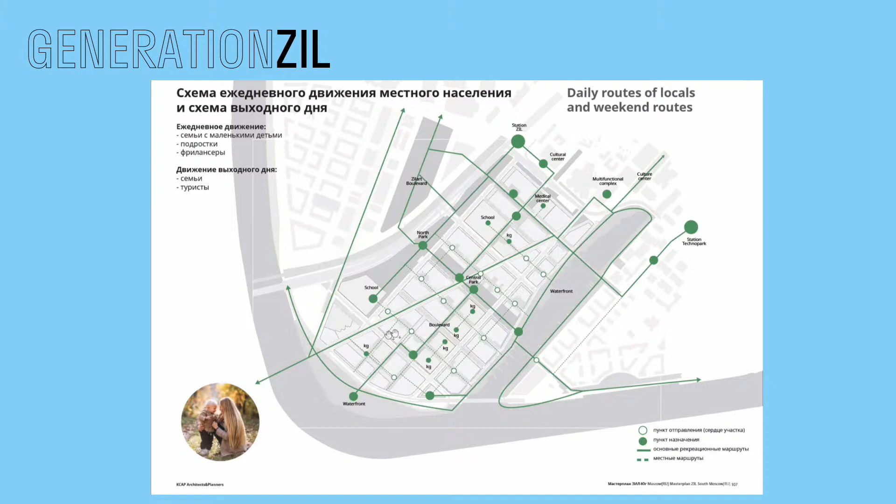If we don't do this bridge, then we don't really understand why the diagonal is there. But we try to integrate the new ties into the master plan to mend the only connection of the neighborhood and to add alternative movement routes for the residents. Of course, the diagonal was in the PPT framework. Unfortunately, it cannot be corrected now.

Let me say a few words about the diagonal, my friends. Look, I know that every next architect always knows better how the project should have been done than the previous architect. I really understand and am open about these things. And when people say, well, it was here before and we can't change it — you know, the master plan of Zil is something we have been seriously working on since 2012.

This territory was planned together with a well-known architect. You probably know him, Yuri Grigorian. You probably know him too. Together with him, we created this whole planning logic — whatever you have with the embankment and movement inwards. We have not only one diagonal, but two diagonals going to the bridge on the embankment.

Nobody canceled the bridge, by the way — it may still be built. So these two diagonals were brought together on this peninsula, and it was planned to do a boulevard here. The metro, by the way, was not in the plan back then. The metro station appeared later, after the entire planning was approved. But the Moscow Railroad Circular Road was there.